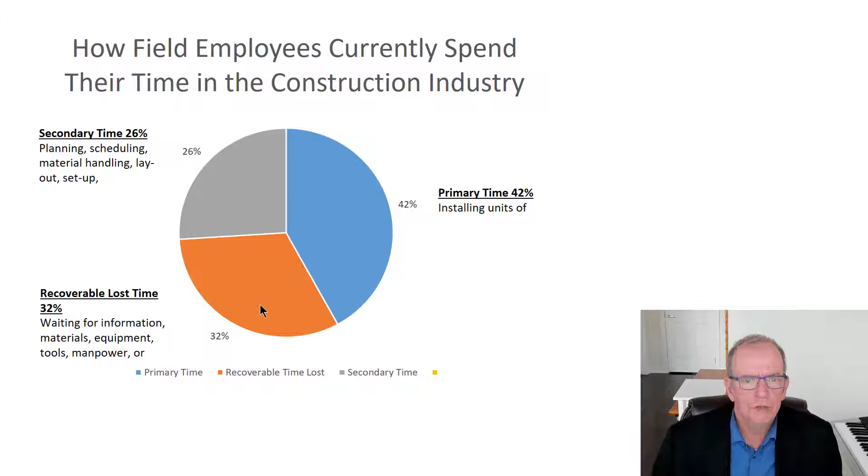Well, most people will look at this, but when we talk about lean, you'll see I'll shift gears a little bit in another lecture. But recoverable lost time, this is a huge opportunity. So I'm not standing here saying that we've got 2% waste in construction, how do we get it down to 1%. I'm saying we've got 32%, big opportunity.

No matter where you look, The Economist, this was from 2017, had a big article on waste in construction and improvements in productivity - how fast you're able to do something with certain inputs, what kind of outputs do they produce. And so if we improve on that, that means with less inputs we get more outputs. That really ties into the ability to meet schedules, the ability to be cost effective and productive in construction. This is what clients expect, but we as an industry globally have not been keeping up with the changes in the rest of the world.

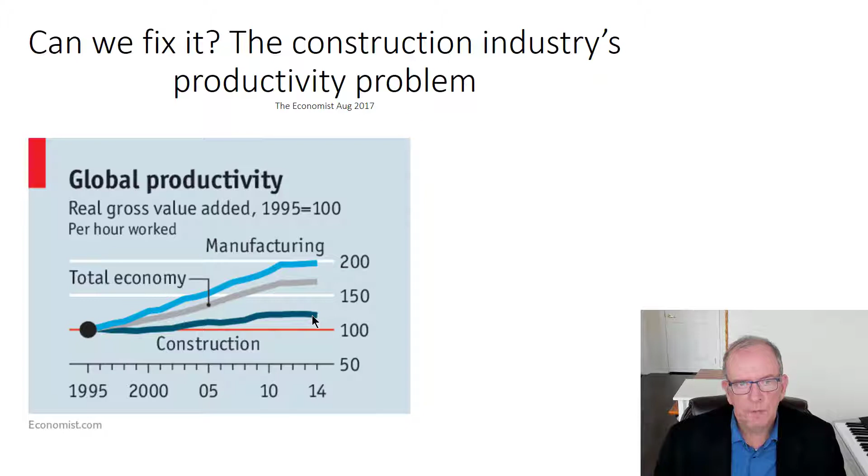Total economy has been improving at about 3% productivity rate per year, manufacturing closer to 4%, and construction less than 1%. So we have not been keeping pace.

There's an excellent report that was put out by the McKinsey Global Institute. I think this link... let's just check if it actually works. Yeah, we're okay with that. So this is the productivity report, which is showing - this is the executive summary, the short gist of it. If you click on that, you'll be able to see this report. It ties into how construction needs to improve in productivity, and it's done a lot of research and input into it and where the opportunities are.

And so lean plays a big part into the report. Integrated project delivery type contracts play a big part into it. So there's a lot of things we can have influence on in the construction industry.

Where I kind of get into it with my students is usually on the aspect of, well, what can you influence managing a project - site supervision, project management purposes. And that I'll get into in much more detail in another lecture. For now, I just want you to have a broad sense of what's going on.

When we think about this from this perspective, let's say this is a financial statement, a high-level financial statement - this would be an income statement. Let's say you're a subcontractor and you have 100 million in sales in a year. You have your own employees - maybe you're an HVAC subcontractor or a plumbing or electrical subcontractor. You have 40 million that is your own people doing the work, the trades. You have materials, you have equipment, you have subcontractors. And so if we take that off the top line, what we have left is what we call our gross profit.

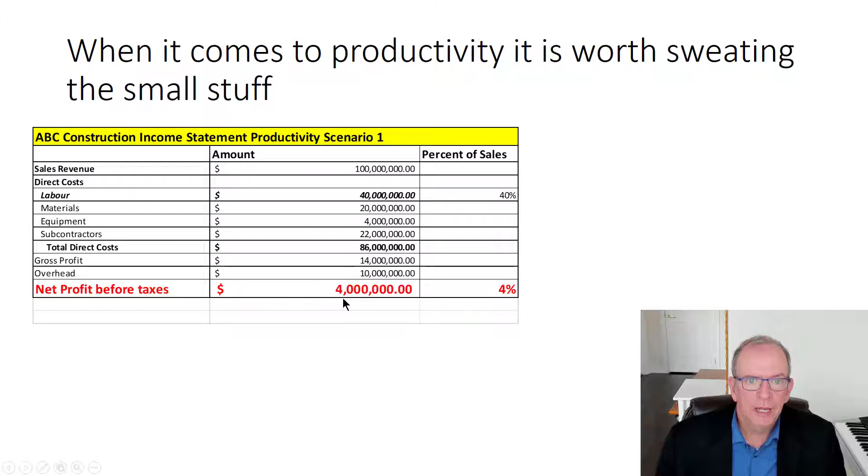People think that construction companies make 25, 30% profit. That is not typically the case. Usually it's in this range of 4 to 10%. All right, so let's say it's 4%.

Well, if you improve your labor, the productivity of your labor by 10%, that would then make the labor cost 36 million. Look what you did to your profit, your bottom line: 8 million. You doubled your profit. So now you've gone from 4% to 8% with a 10% improvement on your productivity, on your own forces in labor.

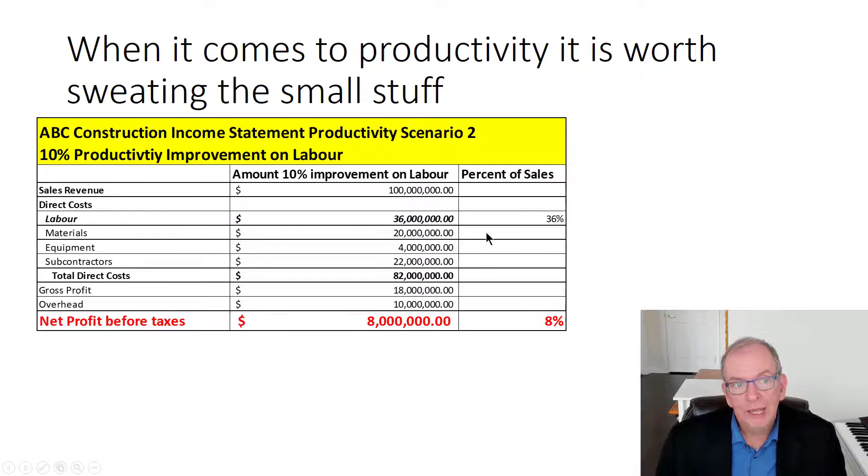That's a big number. So a small improvement in productivity gives you a big improvement in profit if you self-perform a fair amount of work, like a subcontractor in this case. And that number wouldn't be out of line for a subcontractor, or it wouldn't be out of line for a GC that self-performs on their concrete.

So you might think 10% is a lot. Well, 5% would give you a 50% improvement on your profit. 2% gives you a 20% improvement. 1%, a 10% improvement on profit. So that will give you an immense improvement in these areas.

And so that's why the McKinsey Global Institute report, that's why lean construction, that's why BIM, that's why most of the things we talk about in this lecture, is a result of trying to improve productivity so we can make better sense of being more reliable and reduce variation in the construction process.

And if we reduce variation in the construction process, we become more reliable and we reduce variability. And that improves predictability. That means when we price things, they're more likely to happen the way we thought. When we schedule things, more likely to happen the way we scheduled it. And if we do that, we're going to have happier clients because we're adding value to them. And that's going to make us more in demand, and we will win the race of competition—we'll have the competitive advantage.

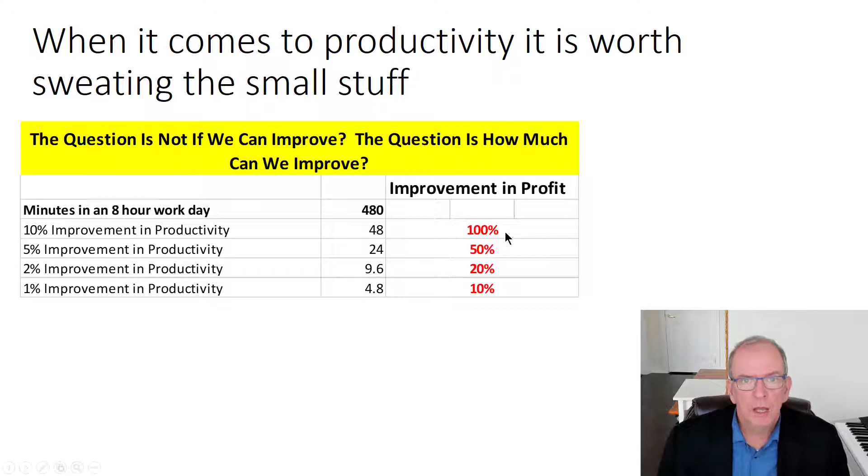So there's a lot of contractors that are moving towards lean construction. And the definition of lean construction is adding value while removing waste. So in this particular lecture, I'm just going to give you these 8 components, 8 types of waste that we deal with in construction, and in another lecture I'll get into defining these in more detail.

Defects—things that weren't constructed properly. Waiting—a big thing in lean construction, we use the term workers waiting for work and work waiting for workers. Workers waiting for work is no good; the clock is running, you're spending money for no reason. Things getting done ahead of time is no good too, if it's basically just sitting there.

And on the assignment project that I give many of you, I'm getting emails: 'Sir, we've been photographing this for 5 weeks and we haven't seen any change in the project.' That is work waiting for workers. So it's not abnormal, unfortunately, and I'm not surprised, but that ties into that.

Transportation of goods—how do goods transfer? How are we transporting them? What's the wait time—stuck in traffic? Are we bringing things from another continent when we could get them close by? What are some of those issues?

Wasted motion. I could spend a week on this topic. Wasted motion, inefficiencies in the workforce, inefficiencies with the trades, doing things twice, walking half a kilometer to a portable washroom and walking back—the time that's in wasted motion.

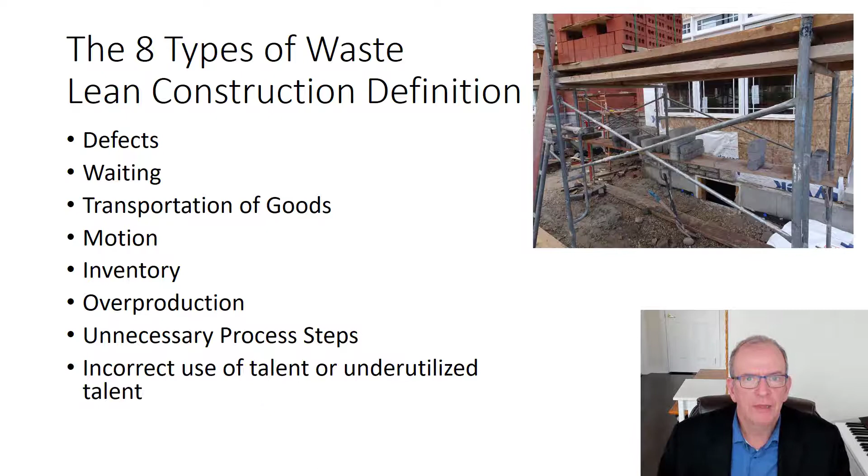Incorrect use of talent, or underutilized talent—not engaging with the people that are working with you. You do not know everything; they have much more expertise in their areas of skill. Have you engaged with them to take advantage of that? That's a missed opportunity. So that's a little quick introduction to some of the lean aspects, but I'm going to talk about that more in a future lecture.

Emerging trends in construction, role of innovation. Really, that's what we're trying to do—we're trying to do more with less resources. That's improving productivity.

Have less work waiting for workers and less workers waiting for work. And we can use a lot of innovative tools and techniques.

Some things are very fundamental. To be honest, with lean, some things are fundamental in how we organize stuff, and some things don't have to be a high-tech solution. But we are at the cusp of humongous innovation, and the construction industry is a laggard at adopting it.

With that said, we're at a tipping point where we're going to see massive change in construction. So we're going to talk about some of these things. Some of these things may not end up being the be-all to end-all that I may mention here. There may be other things that are used in different ways that actually take advantage in different ways.

Building information modeling - I couldn't, 7 years ago, fully comprehend all the ways that it's now being used. And I still don't comprehend how it's probably going to be used in 10 years fully, because it's in the innovative state. It's in the growth state, but it is not going to disappear.

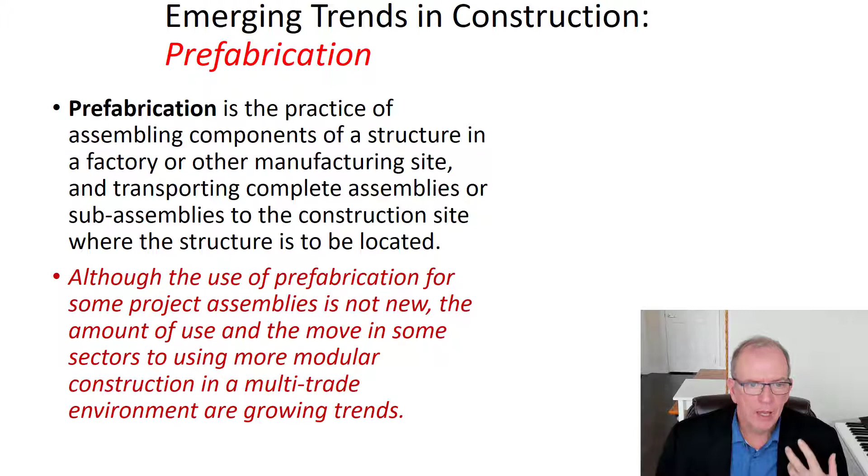Prefab, you'll see some of the advantages. So we're going to go through these in the next 2 lectures that you'll see. Prefabrication - you know what? That's not new. We've been prefabricating stuff for a long time, but it is now at the threshold, tying with other technologies, to be able to do it in a much more sustainable fashion, to a higher quality level and a higher certainty that it's going to work, with the combination of prefabrication and BIM.

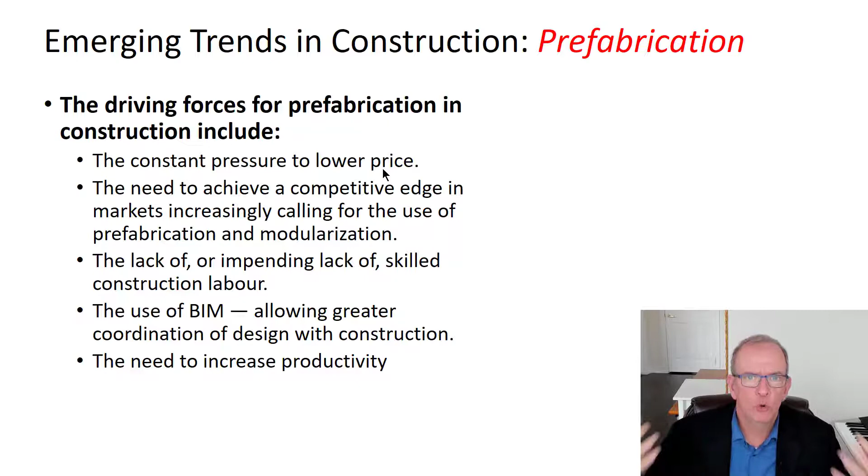It's helping to drive lower prices by scaling. So framing - we used to always frame on site, and we still frame on site probably for 50% or more of the work, but most of the production builders don't frame on site. They get the panels made and then they can quickly assemble them on site. So it shortens the assembly time and they'll do it that way. So there are a lot of these aspects.

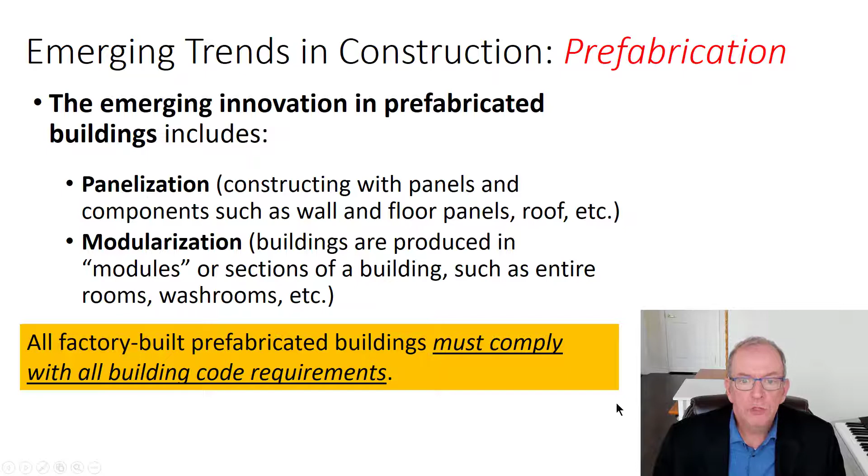Factory built prefabricated buildings must meet building code requirements when they're put on the actual site, and they have to satisfy CSA requirements for the components that are built in the factories. So you're seeing more of this, not less of this, especially when we want to build real energy efficient, tight buildings. There are a lot of opportunities.

I think that the easiest way to build net zero out is likely coming out of a production builder that is using modularization to accomplish that.

Some of the disadvantages are you have a factory and so you've got a lot of overhead. And in a down economy, because construction is cyclical, that becomes problematic. The other problem is getting it to the site. So you bring it to the site in sections and assemble it there.

Mattamy Homes a few years ago built the whole project, like the houses, in their factory. They had some issues with that when you have up and down economies and things of that nature. But that doesn't mean that that's not going to still happen. People are tweaking things and people are seeing the opportunities and thresholds that these bring.

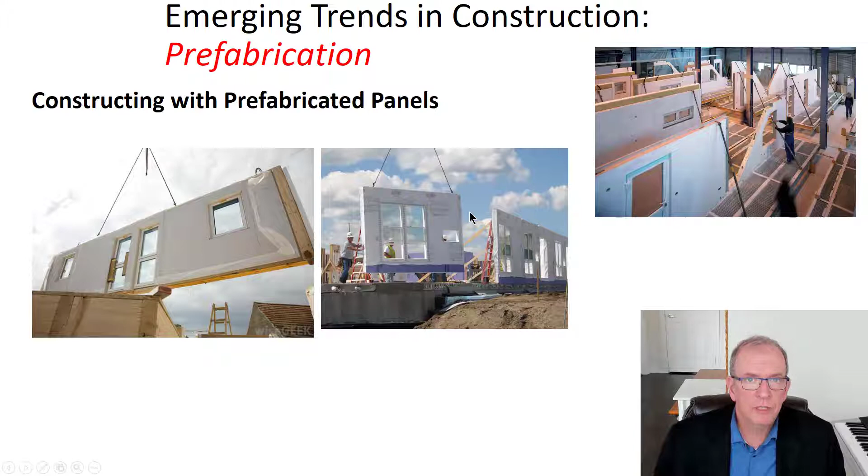Prefabricated homes have been around a long time. But you are seeing a renaissance in that and an opportunity, and you're seeing a lot of investment being placed into the modularization and prefabrication of condominium units too. So I suspect in a few years you're going to see a lot more in that kind of area where you're able to put together larger components and the house gets built this way.

This is using trusses, and then you can see the prefab components, and this looks like a dormer that's built into it. I'm pretty sure, unless I'm mistaken, that might be in Kingston. There's a house right on the edge of Kingston, that particular one.

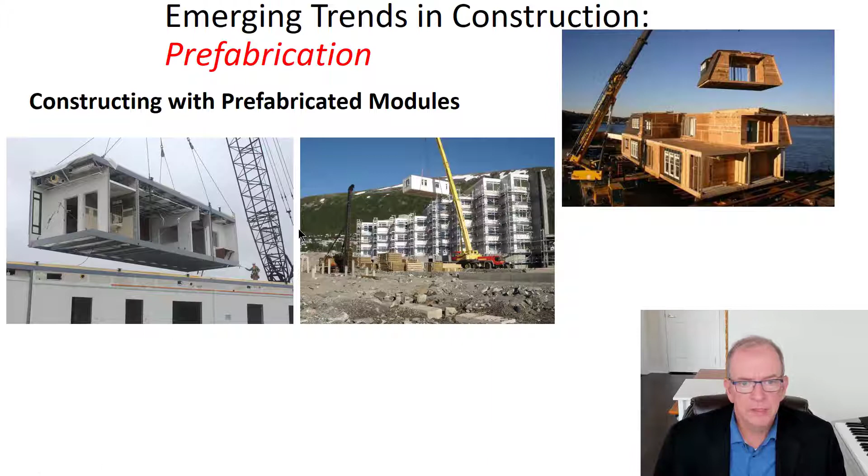Here's a condominium unit, prefab units being installed. You see that with prisons - they do the cells prefab and they install them. You see that in hospitals. So there's a lot of opportunity there.

There's advantages, there's disadvantages, but these disadvantages can be really mitigated with better design and BIM design that ensures that it's done well. So there's a lot of improvements in those areas.

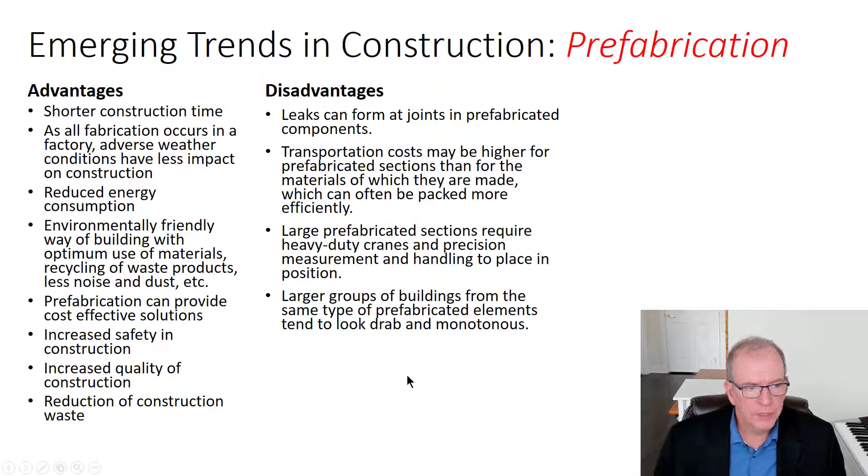Transportation tends to be the biggest barrier in prefabrication. But there's a lot of opportunities in this. And as I said, it will definitely improve productivity.

So sustainable construction - this is whole courses. This is huge. I've mentioned net zero in some of my other courses that I do, and net zero means that the building produces as much energy as it consumes.

We are living in a planet with ongoing climate change going on. This needs to be done. This will be done. Governments are changing building codes to be constantly more energy efficient. So to have economic sustainability, environmental sustainability, social sustainability, this all ties together for sustainable construction.

Costs of building sustainably have gone way down. They're continuing to go down. And it's just like electric vehicles, their usage is going way up. Car manufacturers are changing things over. Yes, it may take a little bit of time, but these things sometimes took a little bit of time to get to this stage, but then things reach a tipping point where change becomes very rapid.

I sometimes think about LEED programs and the certification programs they have. At some point, they're just going to be building code, and that's just the way we do things.

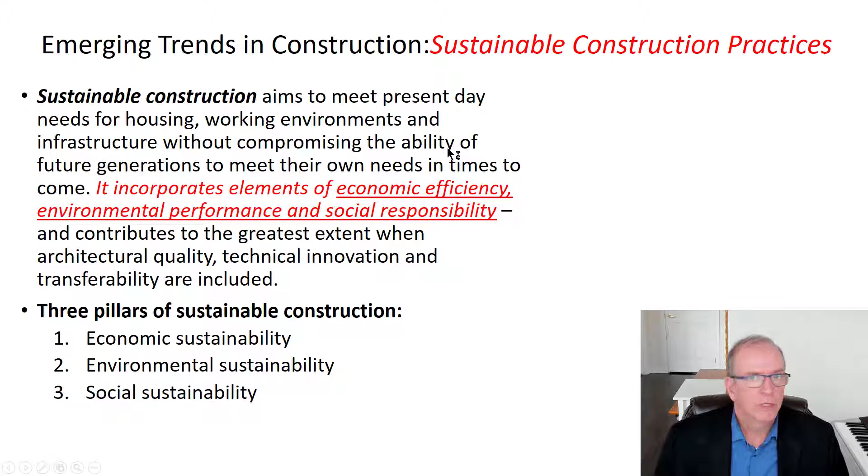So it involves design and management of buildings, looking at life cycle costing. We talked about this in another course. What is the life cycle investment in this? What's our best mechanism for this? Build a tight envelope, make it very energy efficient. That's going to lower the cost of upgrading to more renewable resources as they become more available and cost efficient.

So there are these elements that tie to this: adherence to ethical standards, socially viable environment, stakeholder participation, safe working conditions, innovative financing models. All of these things work together for us to be able to build more sustainably.

And remember, the definition of sustainable is that not only for our generation, but for future generations, the transference of the infrastructure that we have is not impacting our environment in a negative manner. Whereas green building is just building better than the building code, usually about 25% better than the building code.

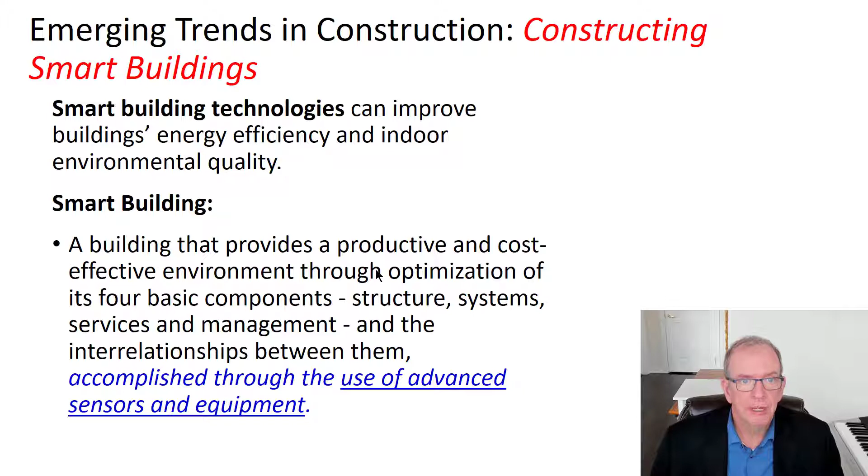Smart building technologies - everything is talking to each other. We're in a world where everything communicates with each other. Originally everything was being wired a certain way for usage in smart buildings, but more and more you're seeing that it's going to wireless technology, which actually makes the implementation of smart building technology all that much more easier.

Intelligent buildings are buildings that, through their physical design and IT installations, are responsive, flexible, adaptable to changing needs from its users and the organizations that inhabit it. That's what it's all about. So it's not necessarily about putting something in that's out of date tomorrow. It's about building buildings that are adaptable and flexible in more ways than one.

And building automation is that integration of communication between your HVAC systems, your lighting, your building automation systems. There's a lot of ways that you wouldn't think that would be such a great deal. I used to think, oh, what's the point of being able to control your furnace if you're not at home?

It's really kind of cool. If you're in another location, you can check - maybe you're on vacation, you want to make sure your furnace is working. You can check that, you can adjust the temperature, you can be sent a notification if there's an issue with it. You can have your security cameras on, and you can have, as an example, a Nest doorbell, and it's got a screen that's a camera onto the street.

A little story, because usually these things connect with stories. So just in the last few months, there was a murder down the street from where I live. And we actually had a Nest camera on the street. And so the police were canvassing the neighborhood, and they were able to access the video so they could see any cars that went up and down that street.

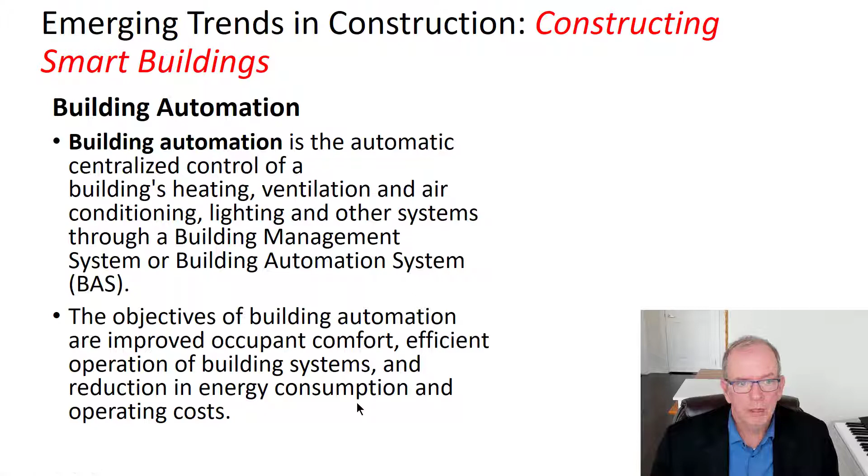So again, you'd be surprised at the different ways that this technology can be used for good purposes. I'm sure there's hacking and things that go on, but as we learn more and more about how we can better manage things, there's opportunities there. So building automation is that integration that takes place between the different systems in communicating with each other.

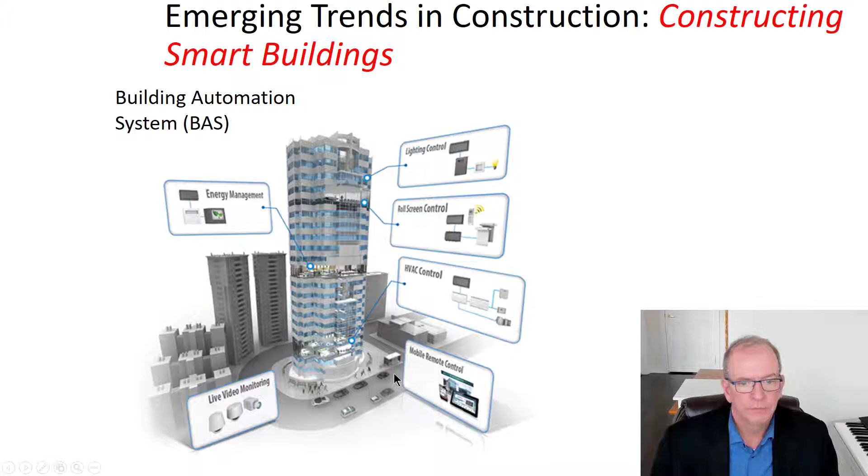Then we get to BIM, which is building information modeling. That is the full integration of our building systems in the design. When we're building them, there are the 6 levels of BIM, which really is level 3, 4, 5, 6: the 3-dimensional, 4-dimensional, 5-dimensional, 6-dimensional.

3-dimensional is your 3D model, which has all of your building systems in it, as well as your structural elements. Then you can look for clashes and interferences ahead of time, and resolve those issues in the model, as opposed to what we do now on the site. That's not good, and I say that about non-BIM projects.

Now on BIM projects, this also opens up the opportunity to do much more prefabrication of fancy ductwork and things that will actually fit when they arrive on site, meaning less rework, less people working on site because the installation time is shorter. Schedules are shorter, clients are happier because we can fit a construction process into a shorter time frame, and they can be utilizing their buildings quicker.

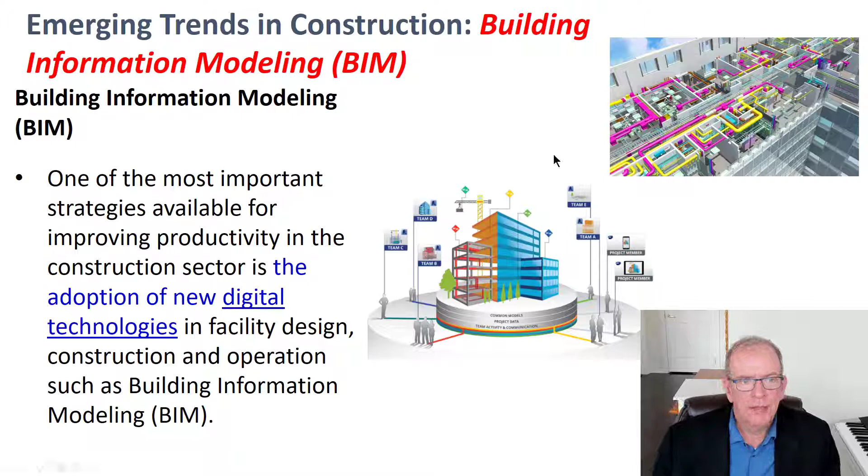So that has a lot of opportunities that way, as well as quality control, as well as you can run energy models tying to sustainability through a BIM model to see how effective the insulating qualities are of this particular building. So not only can you have it for the structural and building systems, you can also have it for operational use so that energy modeling can be done. A lot of advantages to those areas with a BIM model and full integration. And the client can actually walk through their building before it's actually completed.

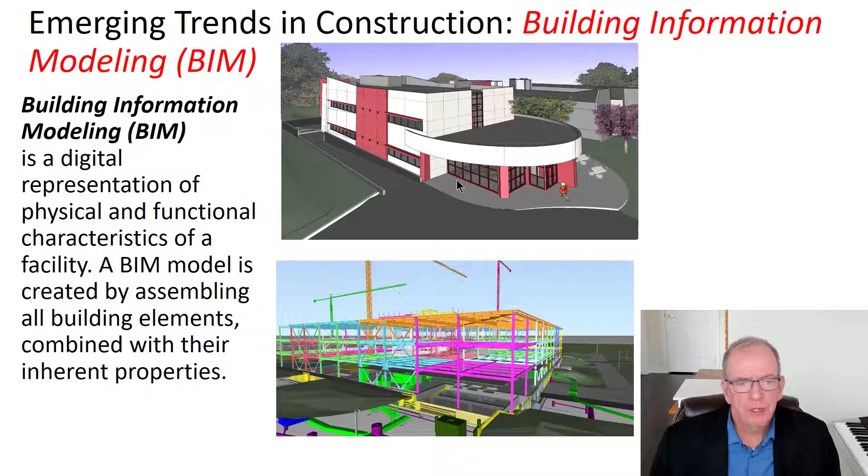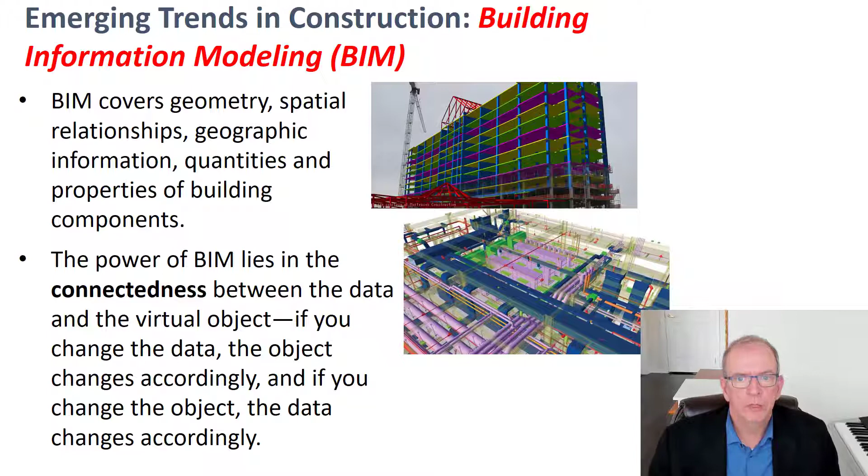So there are good advantages there with building information modeling. And this is the way that we are beginning to do things. Any complex project is doing things this way. Hospitals are doing it this way. Data centers are doing it this way. And more projects every day, because as the trades catch on and as the consultants catch on and we get better and better at this, it's just the way things are going to be done.

It's definitely an emerging trend, and it's integrating everyone into that trend. Nobody is outside of that trend.

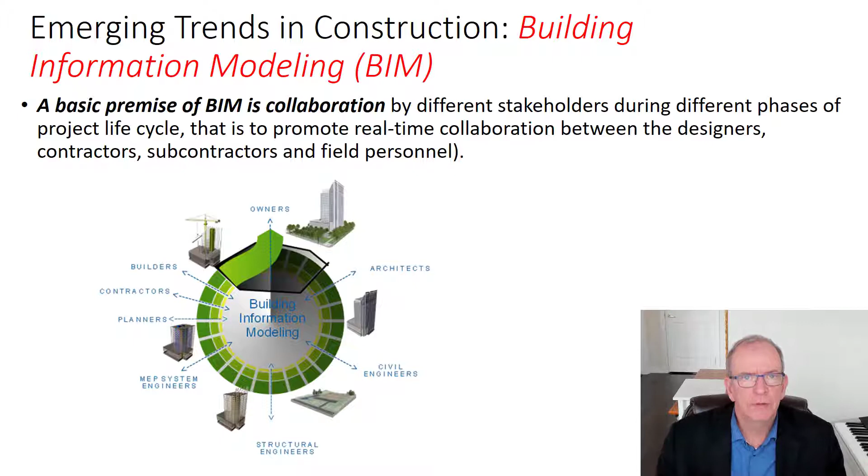3D looks for the clashes and provides opportunities for prefabrication, and how we are going to assemble things. So that's 3D. 4D is how we schedule it, and we can animate the schedule so that we can tie it to a timeline. 5D is estimating, so we can do takeoffs. 6D is where we can integrate with the actual owners and provide them with a complete database of how their building is going to function, operate, and be maintained into the future. So a lot of advantages to BIM with that integration.

This helps reduce the lack of coordination and fragmentation we have, where suddenly on site, oh, this doesn't fit, this doesn't work. I was just in another class and I was asked, do the consultants care about the other areas? Usually they do, because it comes back to them eventually that there's some design error or design problem. But the ability to integrate on the model definitely helps, because you're engaging with the people involved in the project. So this is really a big help.

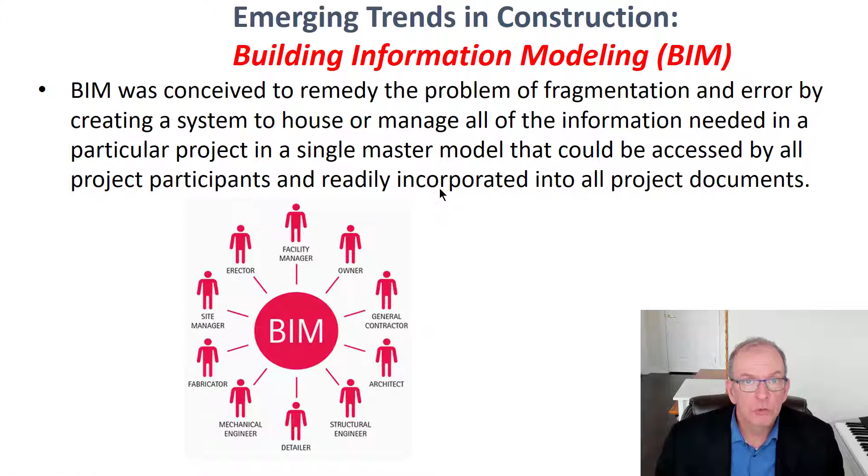I talked about lean. That's really a big help. If we can get more companies working on IPD, integrated project delivery, where there's profit sharing in the construction process, that will be a big help. And when you tie these things together, now you're really moving forward in accelerating your productivity rates and reducing waste.

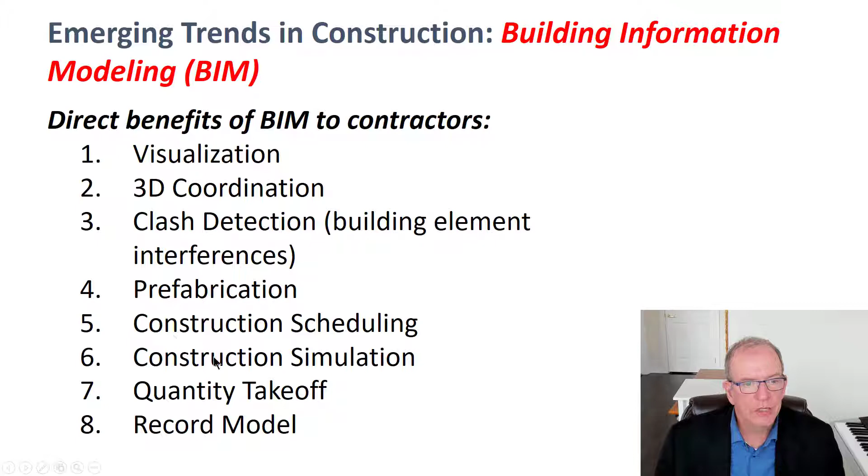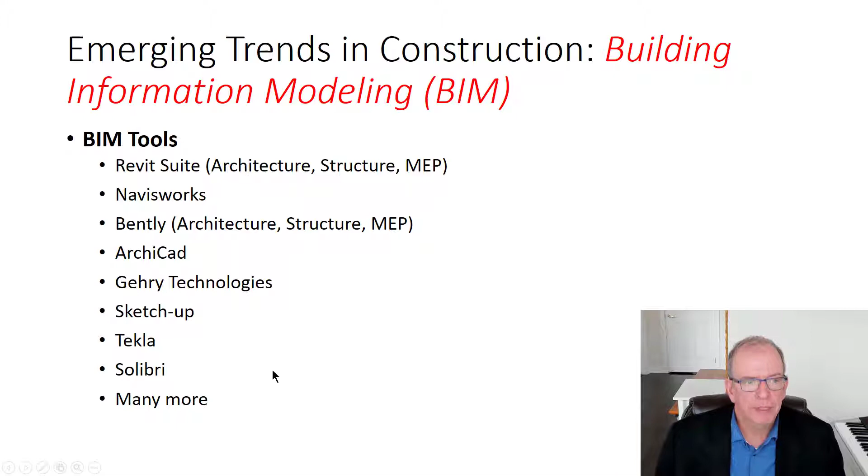So direct benefits: visualization, coordination, clash detection, prefabrication, construction scheduling, construction simulation, quantity takeoffs, and you have a record of the model. Lots of different software, and software is changing by the day, so this is one listing. BIM is not a particular software. BIM is the integration of the various softwares. So don't get hung up on a particular software; it's the integration of the various softwares that ties in.

Lots of different types of models: design models, construction document models depending on what's being looked at, LEED models, contractor models, facility management models. Think about the different ones serving different purposes. Like LEED, you're looking at energy, right? So energy modeling, better daylighting, happier occupants, less sick building syndrome. The various consultants are looking for the models to ensure the design is very functional with very little rework. So those are some of the different models of how BIM integrates.

Now in 8B, a lot of the things we'll be discussing, besides what we've already covered, is again utilizing that we can do more things in different ways and trying to reduce waste in those 8 areas. So if we think about the next section, it's going to be looking at BIM, the integration of lean principles of waste elimination, and what the new technologies can potentially do for us.